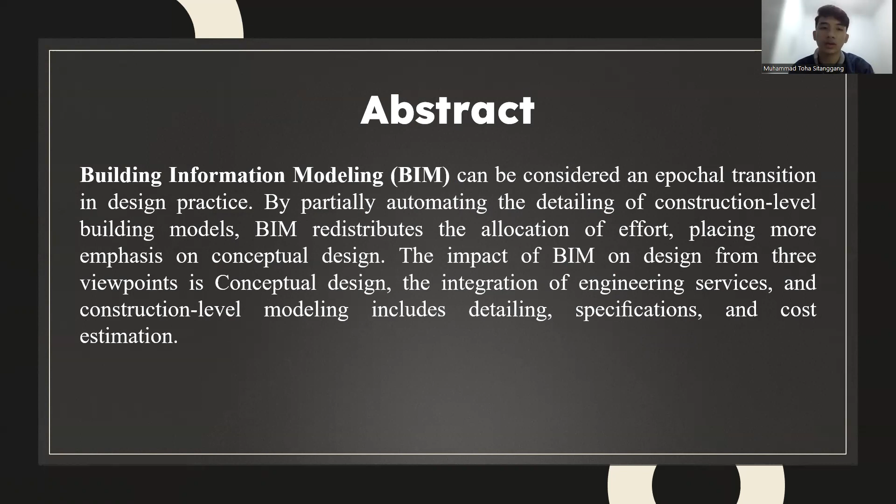Introduction. BIM, building information modeling, is revolutionary in the way it transforms architectural representation by replacing drawings with 3D virtual building models. This writing will talk about automated drawing and document preparation, managing the level of detail within building models, the development and management of libraries of components and assemblies, and new meaning for integrating specification and cost estimation.

It introduces some of the new roles that will arise with this technology and considers the new needs and practices that BIM supports. 2. Scope of design service. Design is the activity where a major part of the information about a project is initially defined. A collaborative form of project delivery.

From the design perspective, the design-bid-build procurement process is based on the following, now discredited, assumptions. 1. Building construction using standard construction practice will be understood by both architect and contractor. Construction methods can be fully anticipated by the architect and engineer, who can optimize design for cost and construction duration.

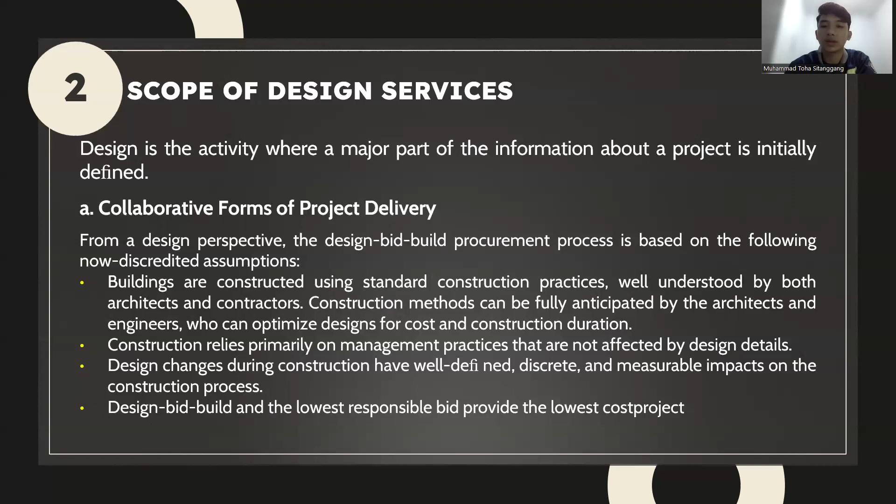B. The concept of information development can also be seen from the diversity of contributors. The main challenge in adopting BIM technology is getting all parties of a design project to engage in the new method of working and of documenting and communicating their work in the new representation. In the end, everyone will have to adapt to the practices associated with this new way of doing business. It will be the new standard practice.

3. BIM used in the design process. The first viewpoint addresses conceptual design. Conceptual design determines the basic framework of the design to be developed in later stages, in terms of structure, general parti, spatial layout, approach to environmental conditioning, and response to site and other local conditions.

A second viewpoint addresses the use of BIM for design and analysis of building systems. Analysis in this respect may be thought of as operations to measure the fluctuation of physical parameters that can be expected in the real building.

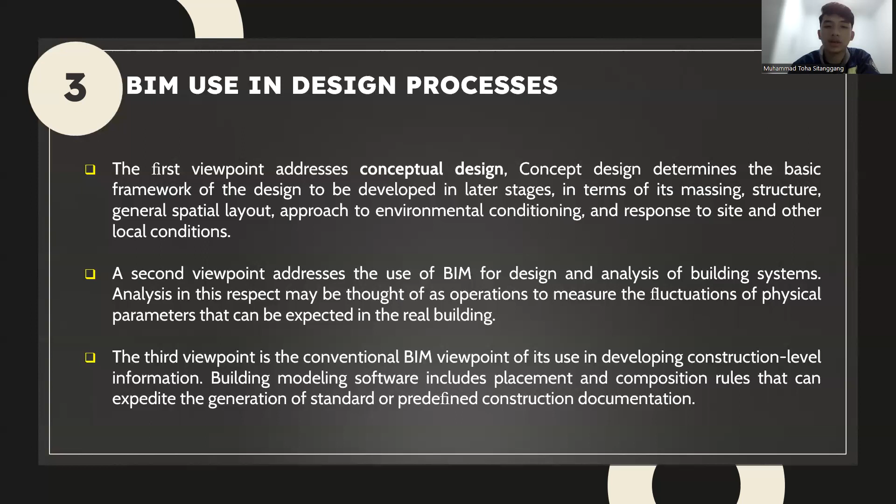The third viewpoint is the conventional BIM viewpoint of its use in developing construction-level information. Building model software includes placement and composition rules that can expedite the generation of standard or predefined construction documentation.

A. BIM-based concept design. Conceptual design typically involves the development and refinement of the building program, the specification of the project in terms of spatial area, function, types of construction, and the basic assessment of its functional and economic viability. Next is 3D sketching tools.

The first, SketchUp. The workflows around SketchUp are not yet very extensive or user-friendly, limited to geometry input for energy analysis. Each step requires data entry and manual manipulation, like the image, sketch layout, style, and editing examples.

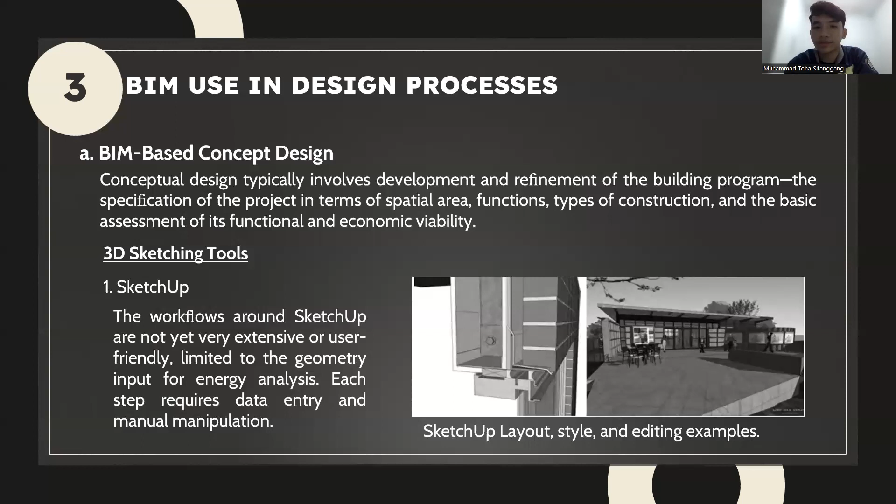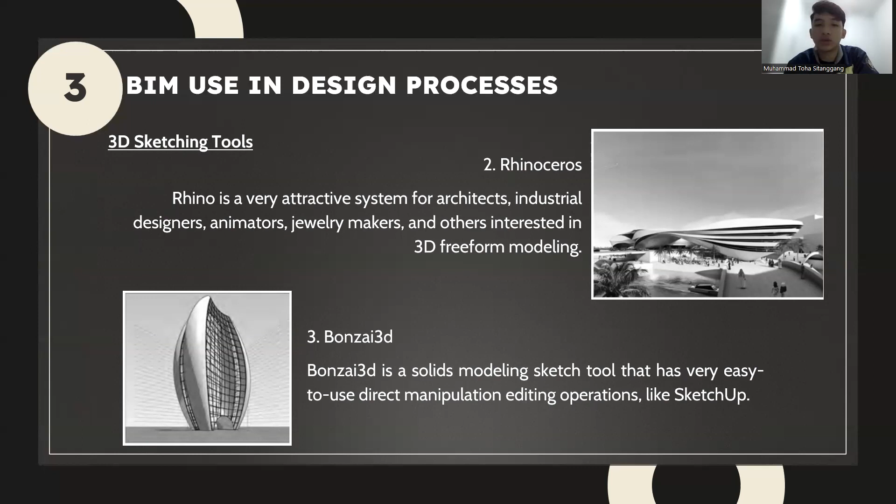Number two is Rhinoceros. Rhino is a very attractive system for architects, industrial designers, animators, jewelry makers, and others interested in 3D freeform modeling. The third is Bonzai3D. Bonzai3D is a solid modeling sketch tool that has very easy to use direct manipulation editing operations like SketchUp.

For sketching with BIM applications, the perceived limitations of BIM applications have been recognized by their developers. Several of them have developed concept-level design exploration tools using generic type objects, like the image.

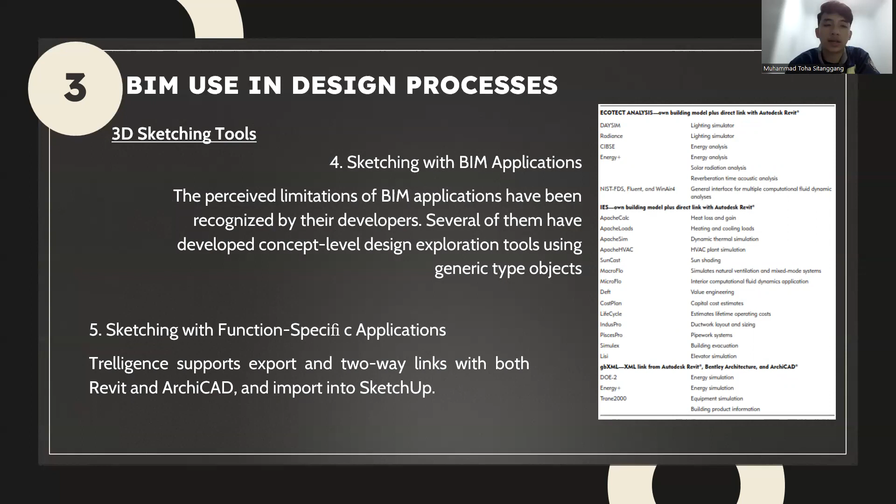5. Sketching with function-specific applications. Trelligence supports two-way links with both Revit and ArchiCAD and import to SketchUp. 6. An example of integrated conceptual design. The general configuration of the GSA preliminary concept design assessment tools, like the sketch.

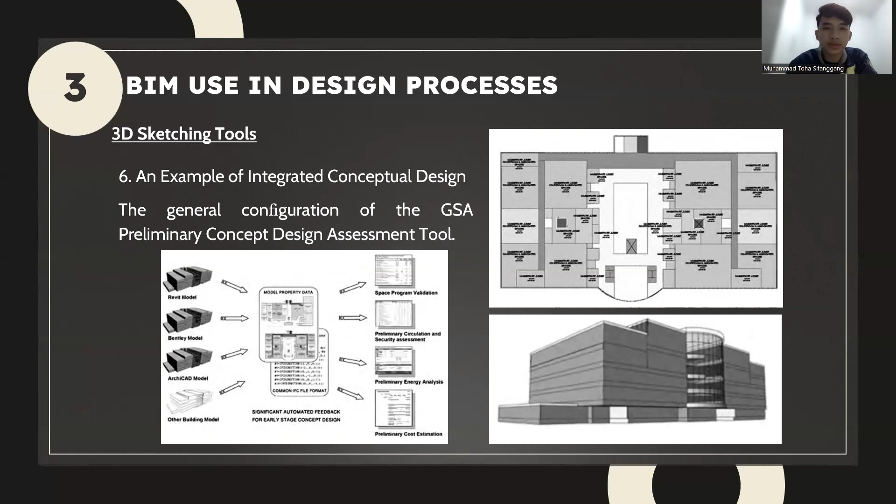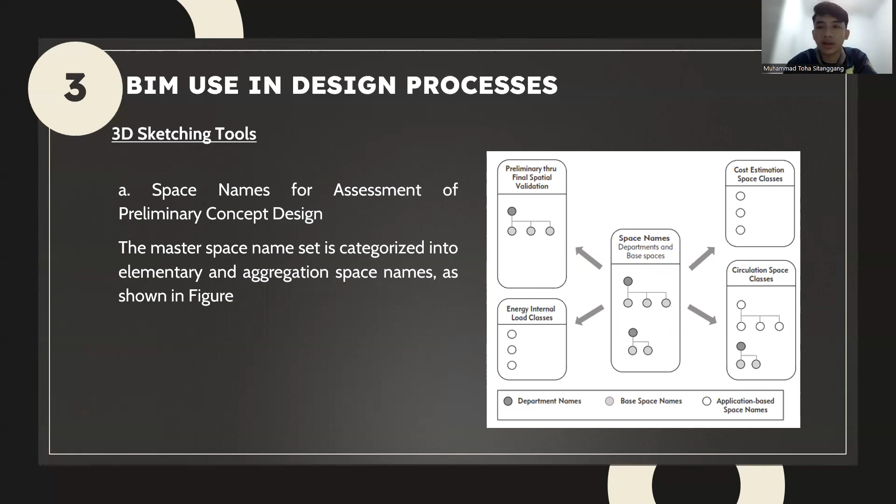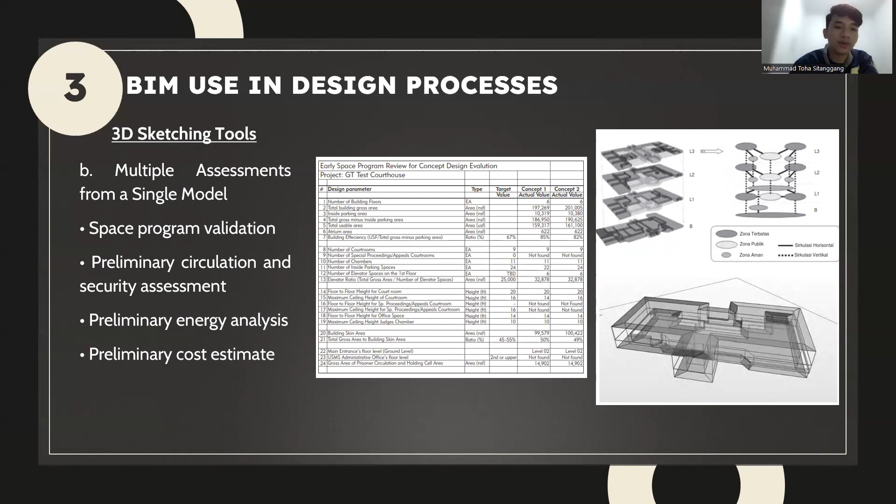B. Multiple assessments from a single model, like space program validation, preliminary circulation and security assessment, preliminary energy analysis, and preliminary cost estimate, like the sketch and table.

B. Building system design, analysis, simulation, and checking. 1. Analysis or simulation software, like a stack of lite-wall precast pieces in a Tekla Structures model with loads defined. 2. Analysis of conformance to building code requirements and regulations.

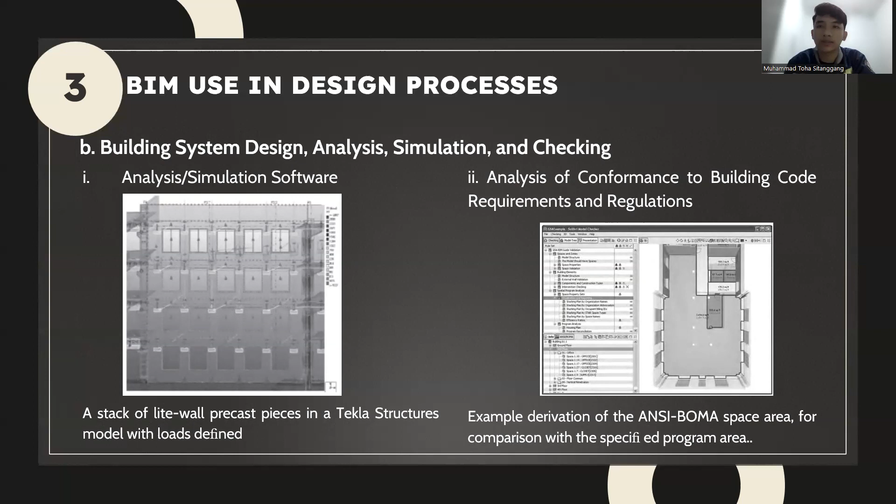Example, like the sketch, derivation of the ANSI BOMA space area for comparison with the specified program area. 3. Cost estimation. The importance of cost estimation for designers is that it allows them to carry out value engineering while they design, considering alternatives that make best use of the client's resources.

4. Simulating organizational performance within facilities. Buildings are built to house various functions such as healthcare, business, transportation, or education. While the physical performance of a building shell is obviously important to fulfilling its intended function, computer simulation tools can also be applied to predict the degree to which the constructed space will support the efficient function of the operations carried out within the building.

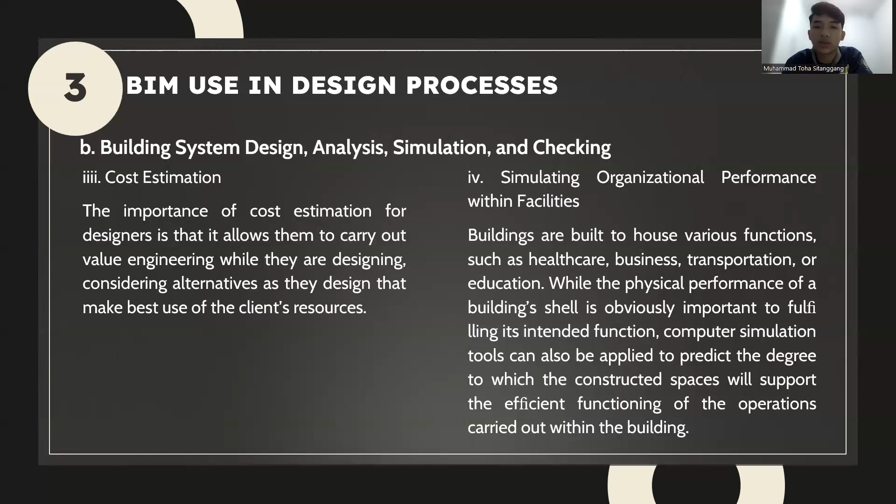C. Construction-level building models. Designers can approach the development of the construction-level model in at least three different ways. One, the building model as a detailed design expressing the intent of the designer and the client. In this view, the contractors are expected to develop their own independent construction model and documents from scratch.

Two, alternatively, the building model is regarded as a partially detailed model to be further detailed for use in construction planning and fabrication. Three, the design team can collaborate with the contractors and fabricators from the beginning, being informed about fabrication issues as they model.

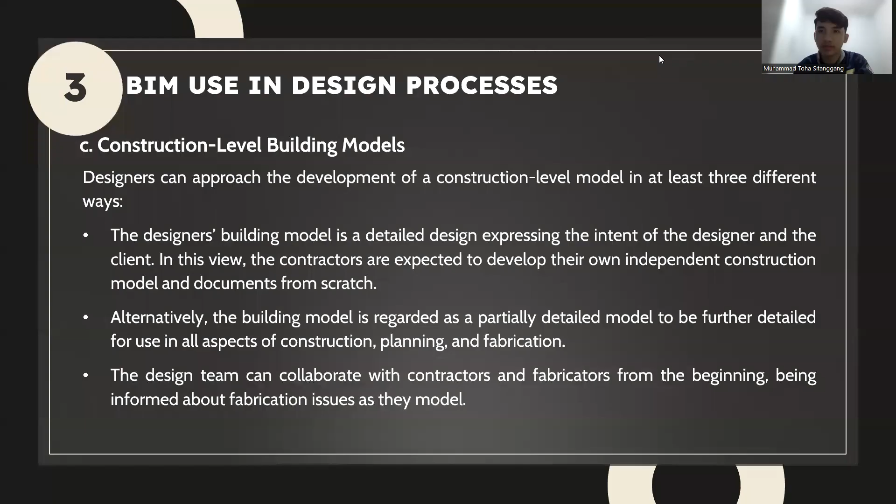Next, in this sketch the model contains details for three subcontractors: structural steel, rebar fabricator, and cast-in-place concrete, and enables the engineer to ensure design coordination among the systems. And on the right is a building system layout application.

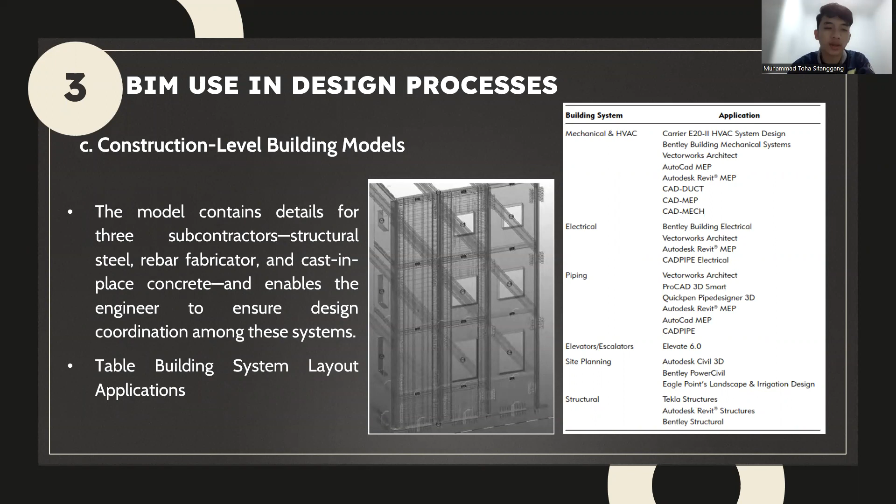C. Construction-level building models. 1. Building system layout. 3D layout during design carries many benefits. If it is undertaken too early, it may result in wasteful iteration. Prior to selection of a fabricator, the architect and MEP engineers should only generate suggested layouts, ideally consulting a fabricator in a design assist role.

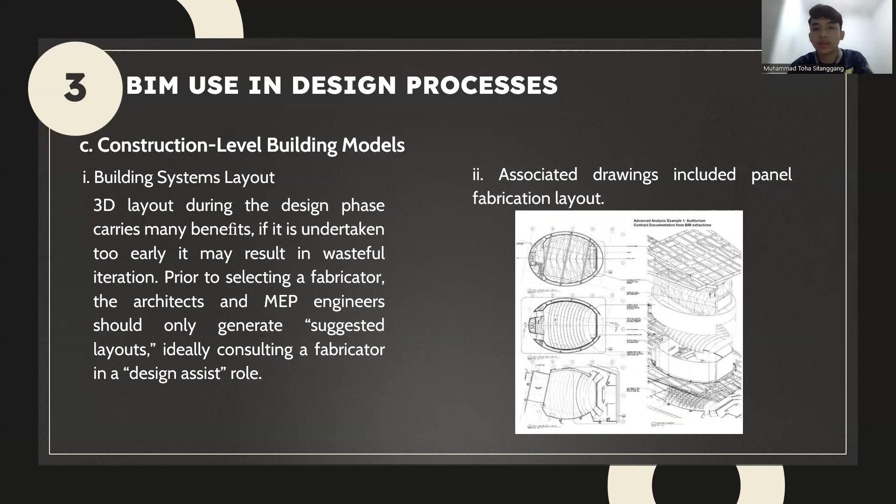2. Associated drawings include panel fabrication layout, like the sketch. 3. Specifications. The 3D model or building model does not yet provide sufficiently definitive information for constructing a building.

The model, or historically the corresponding drawing set, omits technical specification of materials, finish quality, construction procedures, and other information required for managing the realization of a desired building outcome. This additional information is packaged as the project specification.

D. Design-construction integration. The benefits of integration are: 1. Early identification of long lead time items and shortening of the procurement schedule. Next, value engineering during the design process with continuous cost estimates and schedules. Next, early exploration and setting of design constraints related to construction issues.

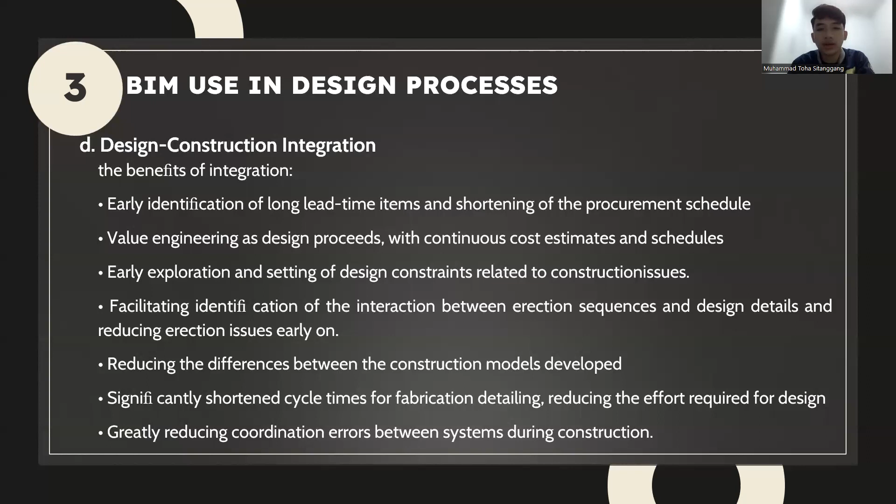Next, facilitating identification of interactions between erection sequence and design details and reducing erection issues early on. Next, reducing the differences between the construction models developed. Next, significantly shorter cycle time for fabrication detailing, reducing the effort required for design. And last, greatly reducing coordination errors between systems during construction.

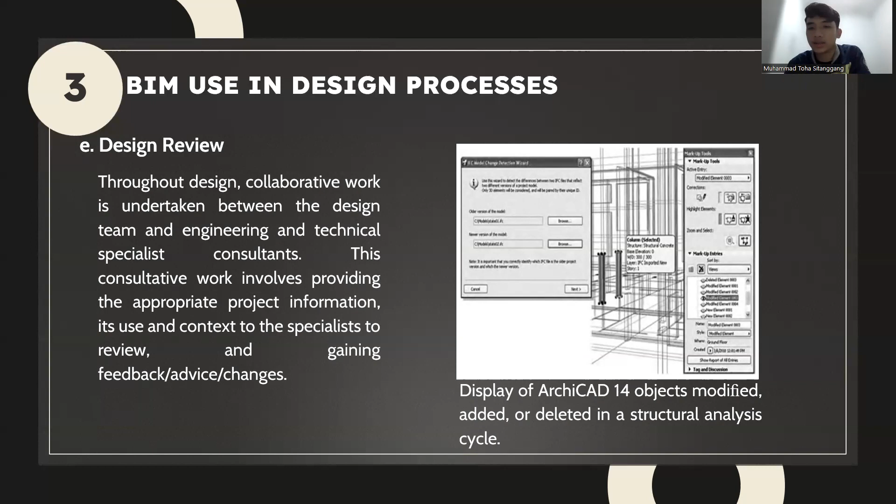E. Design review. Throughout design, collaborative work is undertaken between the design team and engineering and technical specialist consultants. This consultative work involves providing the appropriate project information in a context specific to the specialist for review and gaining feedback, advice, or changes. Like the sketch, a display of ArchiCAD 14, where objects are modified, added, or deleted in a structural analysis cycle.

4. Building object models and libraries. BIM involves the definition of a building as a composed set of objects. The challenge is to develop an easy to use and consistent means for defining object instances appropriate for the current stage of design and supporting the various uses identified for the stage.

A. Embedding expertise into building components. Expertise is an important means to transfer the expertise from the individual to the organization and to allow it to be used more widely without constant demand on the individual.

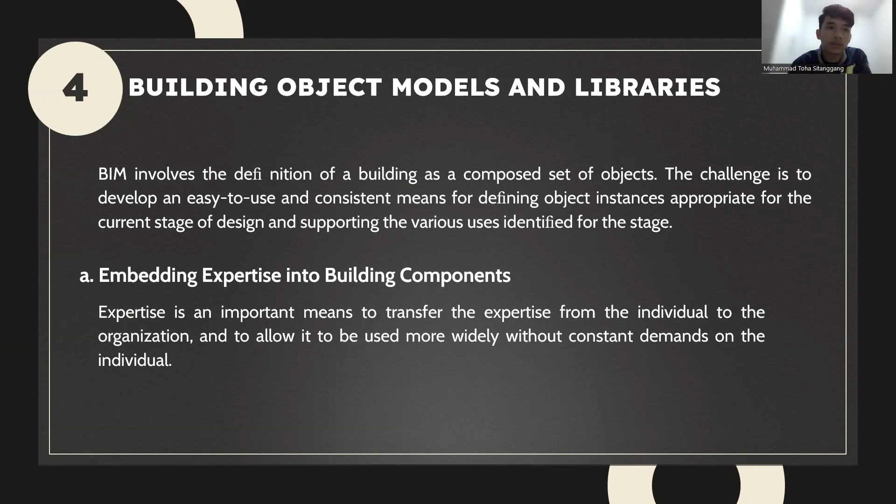B. Object libraries. One, object definition. An advanced object specification. One, 2D or 3D geometry. Next, material representation with name and model graphical finish. Next, parametric geometry, if not fixed.

Next, connection location and requirements with other systems. Next, performance specification, operating life, maintenance cycle, light transmittance, and other specs. And the last, luminous intensity distribution curve for light fixtures.

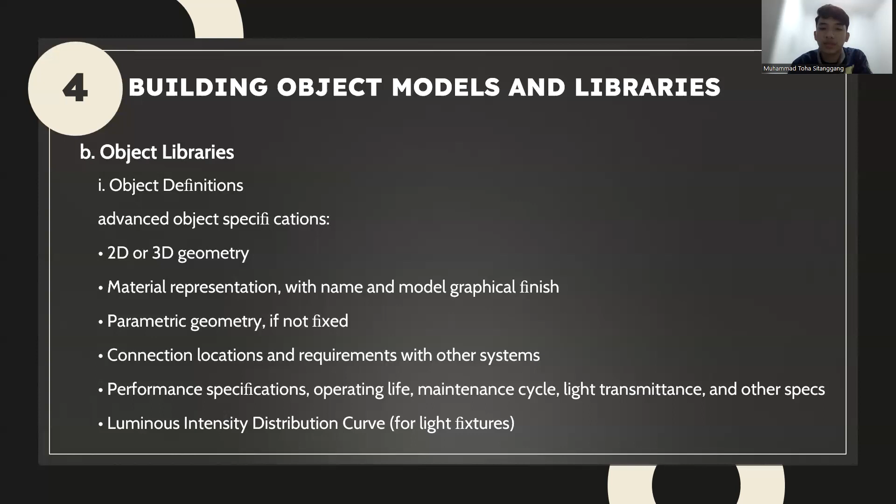B, object libraries. Number two is organization and access. Library objects will need to be accessed and integrated to the project using the standard nomenclature defined within the BIM platform for proper interpretation.

Full integration includes object classification, naming convention, attribute structure, and possibly the designation of topological interfaces with other objects reflected in the rules used to parametrically define them.

C. BIM portals. BIM portals serve as web access points for building objects. Both public and private portals have emerged in the marketplace. Public portals provide content and promote community through forums and indexes to resources, blogs and like that.

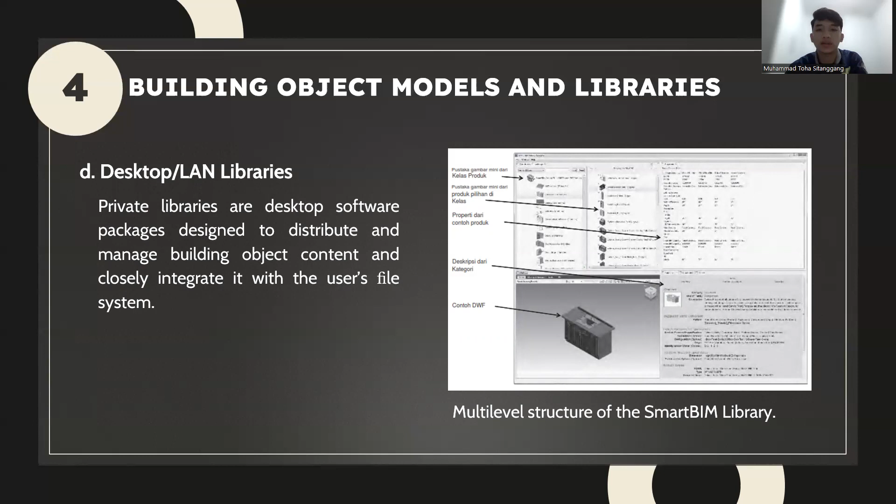The desktop or LAN libraries. Private libraries are desktop software packages designed to distribute and manage building object content and closely integrated with the user file system, like the sketch of the multi-level structure of the smart BIM libraries.

5. Considerations in adoption for design practice. Moving the base representation of building design from a set of drawings, even if produced digitally, to a building model has many potential direct benefits. Automatically consistent drawings, easy identification and removal of 3D spatial conflicts, automatic and potentially accurate preparation of bills of material, improved support for analysis, cost, and scheduling applications, as well as others.

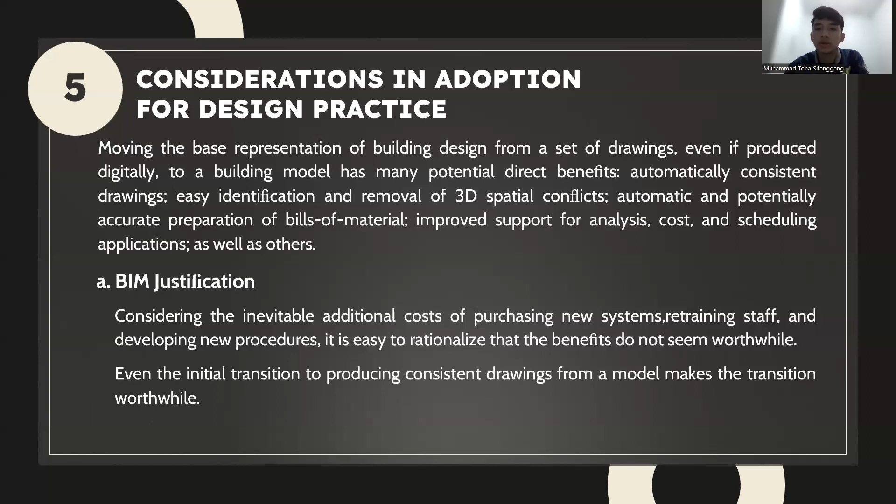A. Building information modeling justification. Considering the inevitable additional costs of purchasing new systems, retraining staff, and developing new procedures, it is easy to rationalize that the benefits do not seem worthwhile. Even the initial transition, to producing consistent drawings from the model, will make the transition worthwhile.

B. Training and deployment. Collaboration requires engineering, mechanical, or other specialty consultants. The default initial integration arrangement is to rely on drawings in the conventional manner. Very quickly, however, the extra step required for producing drawings leads to the desire for model-based exchange.

C. Phased utilization. The first is integration with cost estimation. Next, integration with specifications for better information management. Next, design level integration with performance analysis for energy, airflow, and lighting. And then development of proprietary company libraries of detailing, room configurations, and other design information.

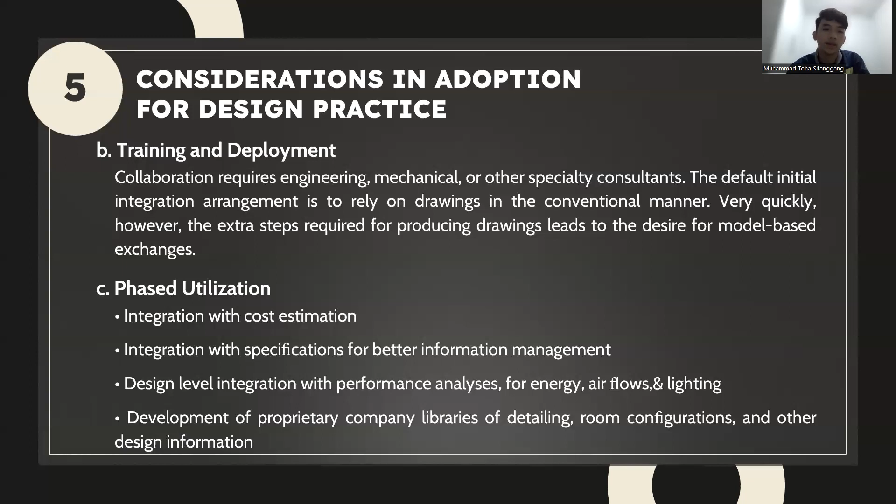6. New and changed staffing within design firms. The greatest challenge in implementing the new design technologies is the intellectual transition in getting senior design team leaders to adopt new practices. The challenge is to engage them in the transition in a way that enables them to realize both their own expertise and also the capabilities that BIM offers.

As design firms adopt BIM, they will need to assign responsibility for the new and expanded roles that will be crucial to their success. The first is system integrators. This function will be responsible for setting up exchange methods for BIM data with consultants inside and outside the firm.

And the second is model manager. While the protocols for version control and managing releases are defined and well understood within the drawing document-based world, whether paper or virtual, options are different and more open-ended with BIM.